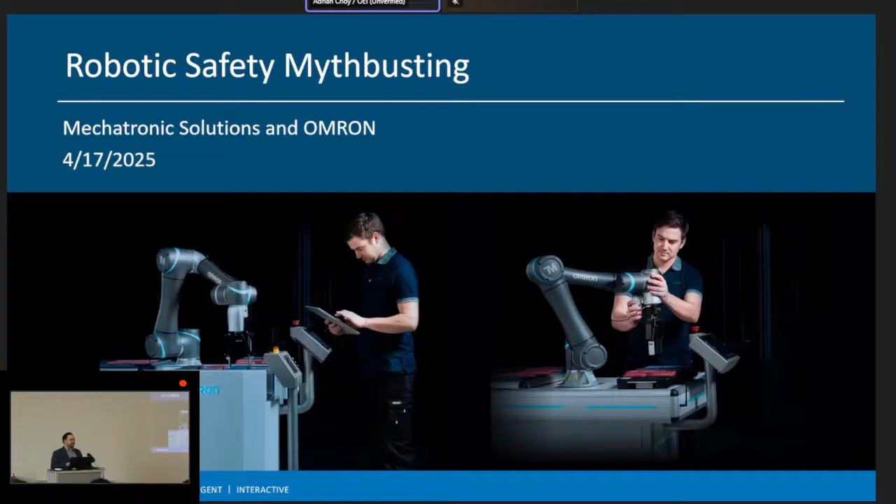Today I will be talking about myth busting robotic safety. There's been a lot of misconceptions with AMRs and collaborative robots. I think we've all been to a trade show where companies are being a bit cavalier with their robots because they have engineering supervising demos, or they want to show off the capabilities in a non-typical environment.

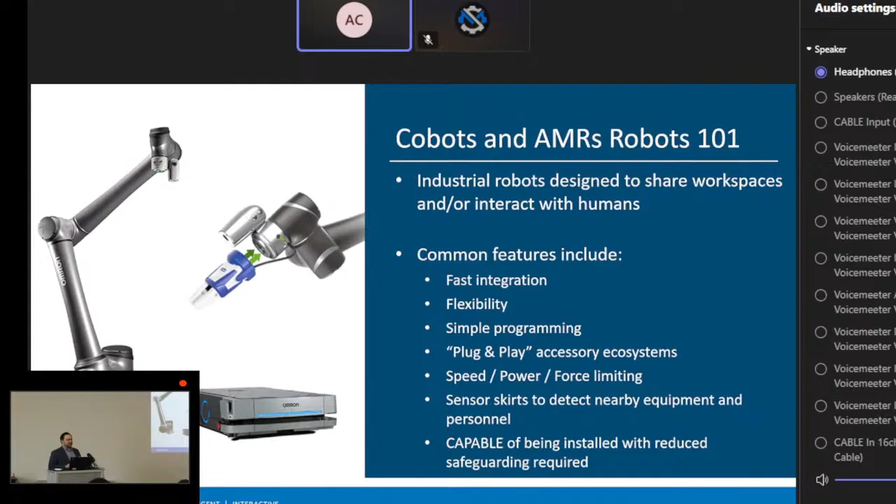But that has also led to people thinking that these types of robots are safe out of the box. Before I go too deep into this, I wanted to introduce Omron. We have existed for almost 100 years at this point. We were founded in Japan, focused on components, but since then we've developed PLCs, HMIs, safety gates, motion drives, and of course, robots. So we are a full automation provider with a global footprint.

Brief primer on cobots and AMRs. To delineate things, I will be referring to both as collaborative robots, which they technically are, but the industry has basically reserved that terminology for just the six-axis arms we're familiar with. So when I'm speaking about the arms, I'll be referring to those as cobots. When I'm speaking about both, I'll refer to those as collaborative robots.

In a nutshell, these are industrial robots designed to share workspaces and/or interact with people. That helps simplify things in terms of making the real estate more manageable, so you can have humans sharing workspaces with robots instead of having extensive safeguarding.

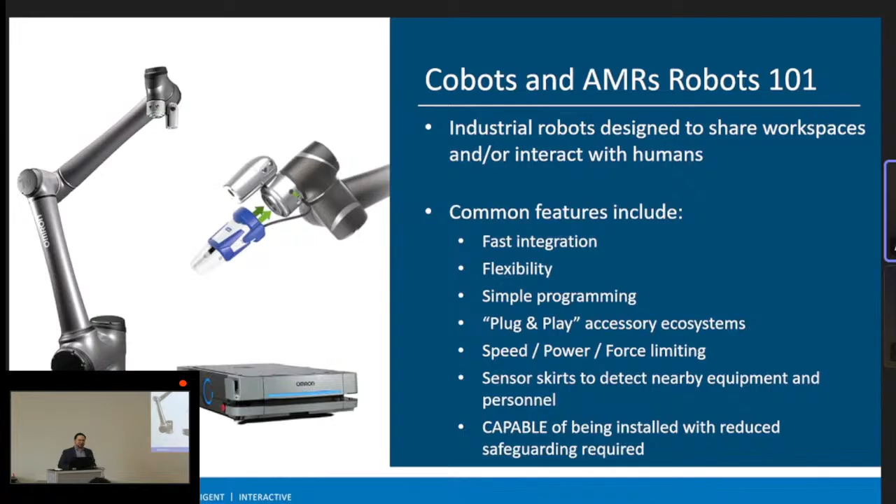Some of the features that enable this are fast integration, flexibility, and simple programming. There are usually feature sets that make integrating these robots into an existing environment fairly streamlined, be that simplified programming languages or ease-of-use features like being able to scan a map with an AMR by simply having a joystick and driving it around.

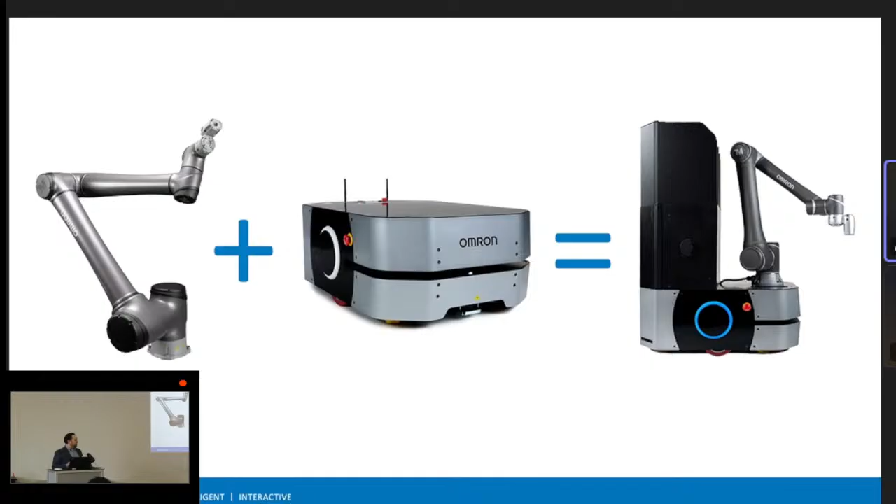Additionally, there are many partners of ours that have plug-and-play accessory ecosystems. Companies like Schunk and OnRobot have off-the-shelf gripper or topper solutions for these robots, which further simplifies developing a robotic solution. There's also options to limit speed, power, or force in certain scenarios to help comply with safety standards and regulations, and sensor skirts to enable sensing of the environment around it. Now, these robots are capable of being installed with limited safeguarding, and we're going to put a pin in that.

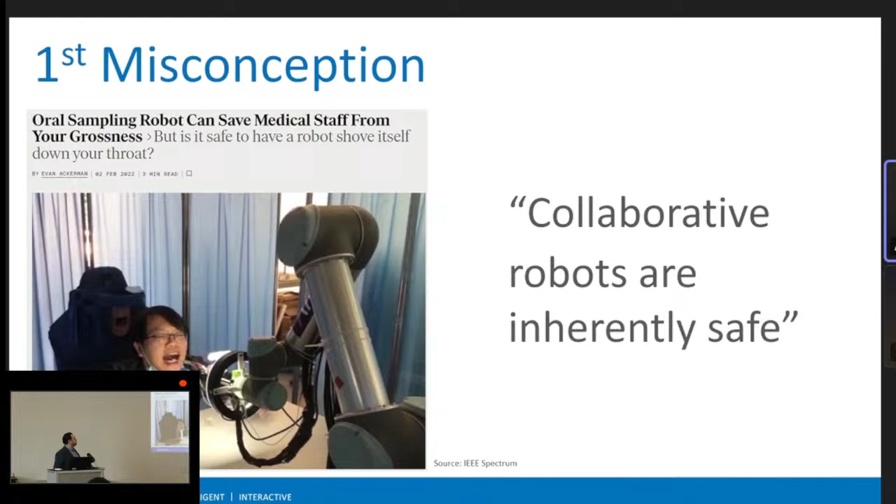So most people's understanding of collaborative robots is that cobots are safe out of the box, AMRs are safe out of the box, and if you put a cobot on top of an AMR, you get double the safety. I think we can all agree that's not necessarily the case, but that has been the public perception thanks to us talking about safety in terms of marketing, without really getting into the nitty gritty of what you need to do to actually achieve that.

Hopefully, by the end of this talk, we can understand how to communicate safety to customers and end users, develop our own understanding, and appreciate how safety can actually boost our efficiency.

So we're going to do some myth busting today, and I have three misconceptions I want to correct. First: collaborative robots are inherently safe out of the box. This is a huge misconception I find among people, especially end users and customers new to robotics.

An example here is a university in Shenzhen that, during lockdown, used a certain competitor's cobots to do COVID samples, nasal and oral. There are specific standards that say your cobot is not allowed to come into contact with someone's head or neck, so this is automatically a no-go application. Interesting idea, but not the intended scenario for collaborative robots.

So what's the reality? Collaborative robots are designed to adhere to standards and regulations. You'll often see in marketing material that this cobot adheres to ISO TS 15066, or this AMR complies with ANSI B56.5. That means these products are capable of complying with that, but you still need to put in the sweat equity to make sure the way you apply that robot complies with those standards, because an application must also be collaborative. One of our engineers at Omron has a line I'm going to steal: you can't put an ice pick on a cobot and call that a collaborative application.

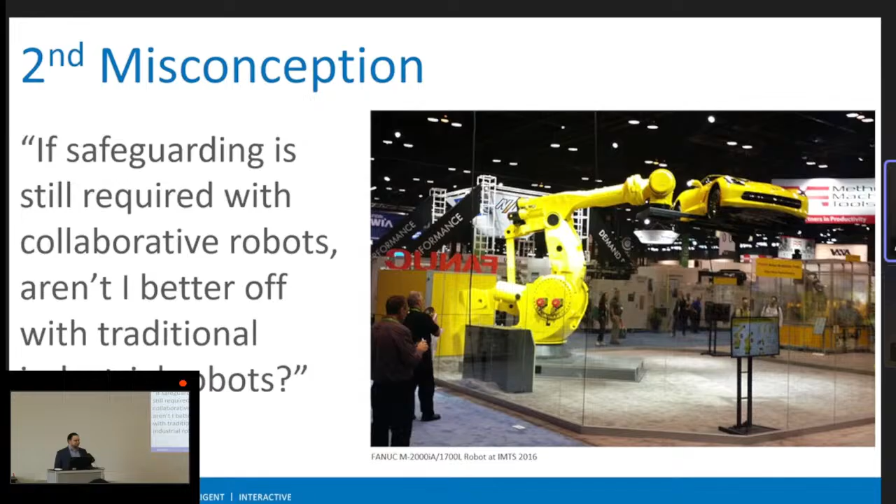So when you're looking at whether or not your application is collaborative, you have to take into account all the variables. Your payload, what are you carrying? Once again, if you're carrying molten glass and you're driving that around people, that's not a collaborative application. The shared workspace—if the robot's in motion, are you going to create entrapment scenarios where you block exits or prevent people from moving back and forth in an emergency? Even the tooling, once again, blades, anything that has too much motion like a conveyor topper, when those are in motion on an AMR, you have to be considerate on how and where that's used.

Even the payload—we'll get into a deeper dive on this. But for palletizing applications, if you have a cobot running full speed, that 10-kilogram payload can turn into a 10-kilogram projectile if that gripper fails.

So I listed here some common cobot standards and regulations for both the cobots and the AMRs, but this technology is pretty nascent. We're trying to catch up with where the technology was and when the standards were written to the present day. The standards and regulations are always evolving, especially for AMRs. We're actually going to see some standards come out and take effect in 2027 from Europe. So don't always think that if you were in compliance once that you're always going to be in compliance, and expect that from robot manufacturers as well.

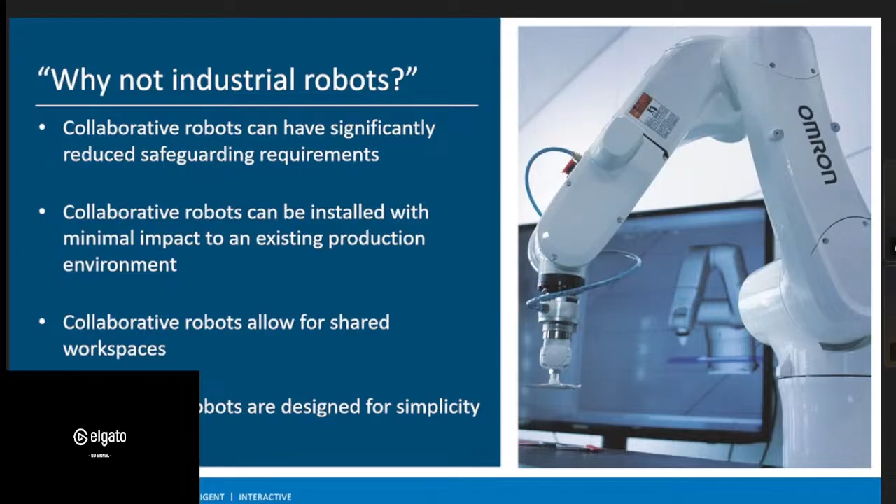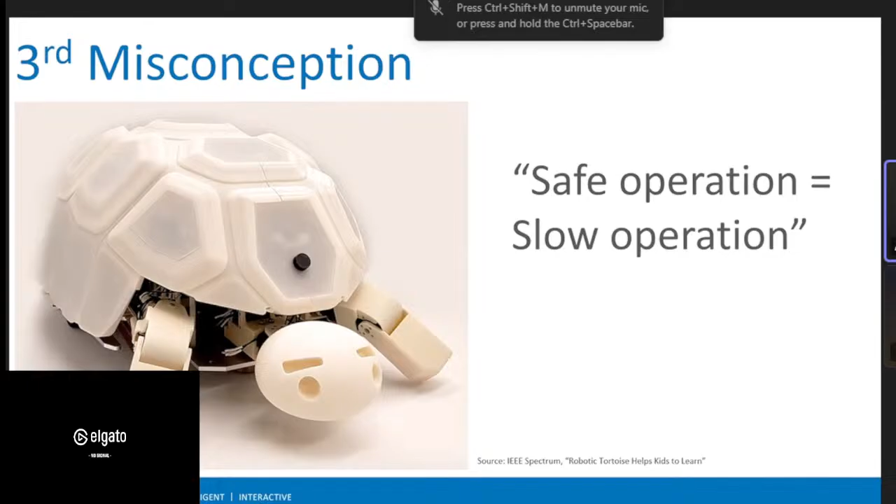Second misconception: with all that hullabaloo about they're not safe out of the box, you still need to do your due diligence—then what's the point of using a collaborative robot in the first place? You're telling me that I still have to put in safeguarding and pay for all these safety products. Well, why am I not just using a traditional robot like you see with these 6-axes, or maybe even conveyance systems instead of mobile robots?

The truth is, yes, you do need to consider everything, and you will most likely need to have some form of safeguarding, either hard barriers or safety products for scanning, but you could still have significantly less safeguarding than a traditional industrial robot or a conveyance system. So if you are tight on real estate, if you have an existing application, you want to shift from manual labor to automated labor, you could reduce how much you have to shift your existing space with these collaborative robots if you play your cards right and respect safety.

That is also to say, you can make sure that if your application still requires a human touch, human intelligence, something that we can't automate yet, you can still share those workspaces, but automate the menial tasks such as pushing carts or screw driving certain things, and leave humans to do the more intensive work that requires our brain power, like detailed inspection, metallurgy, loading test samples into testing jigs for medical applications, things of that nature.

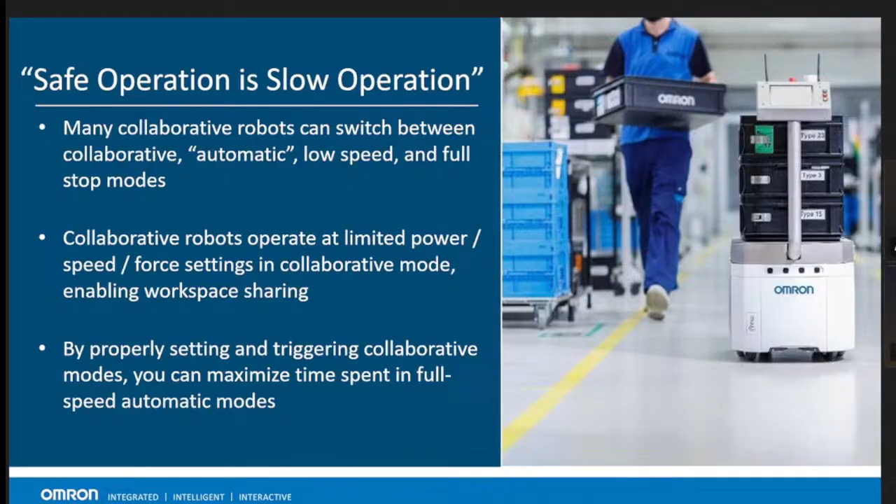And again, collaborative robots are designed for simplicity. A lot of the programming platforms for these are useful for redeployment. So if you are a small to medium end user or customer and you're growing, this might be a good step to have an affordable option to invest in for automation now that you can easily repurpose and reconfigure as your production area grows.

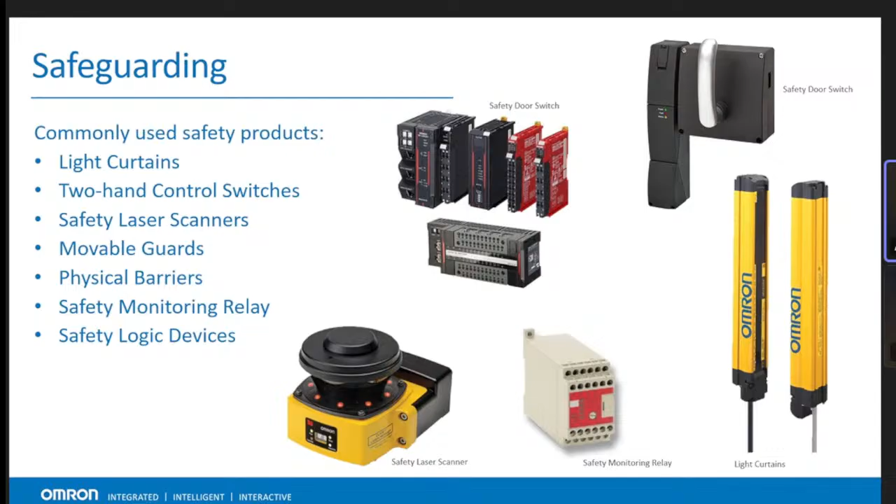The third misconception: safe operation is slow operation. If I have to use a collaborative robot and safety scanners, and if I have to shift to slow speeds, then that's just going to slow down my production, and I'm better off with 5 people working around the clock doing this, or an industrial robot instead of using a collaborative robot.

That's not necessarily true. And if you play your cards right, you can actually increase your overall operating efficiency. All these collaborative robots, the cobots and the AMRs, have different modes they can switch between. So for example, there might be a demo out there where a cobot hooked up to a safety scanner based on the proximity of people around it can either go from a higher automatic full speed mode to a slower mode to a full stop based on the proximity of people. And you can configure that based on the stopping times you need, the type of application you're doing.

Similar for AMRs, you can have zones in your workspace where the robot slows down if it's a high traffic area, or even a no-fly zone so it doesn't block a certain area that people need to go through without worrying about AMRs. So yes, you will see slower speeds when you are sharing workspaces, or even see a stop in the robot while those people are in there.

But if you configure your safety correctly, where you maximize the speeds and times during which people are not in the area, you can make sure that those slow interactions only happen when people are in proximity to the robot, and you maximize your cycle times when they're away.

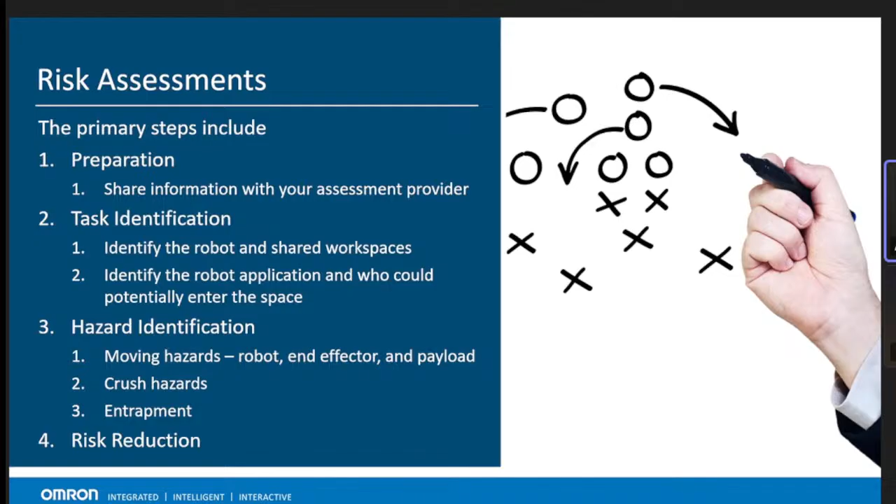Of course, this also requires you to bring awareness to your workforce to say, hey, don't just hover around the robot, respect the safety around the robot. Don't film a TikTok of you jumping in front of a mobile robot to show that it stops. All of that. You have to educate your workforce. But this can be a vehicle for you to save on real estate, save on safety products, and still maintain high cycle times, assuming you've done your homework.

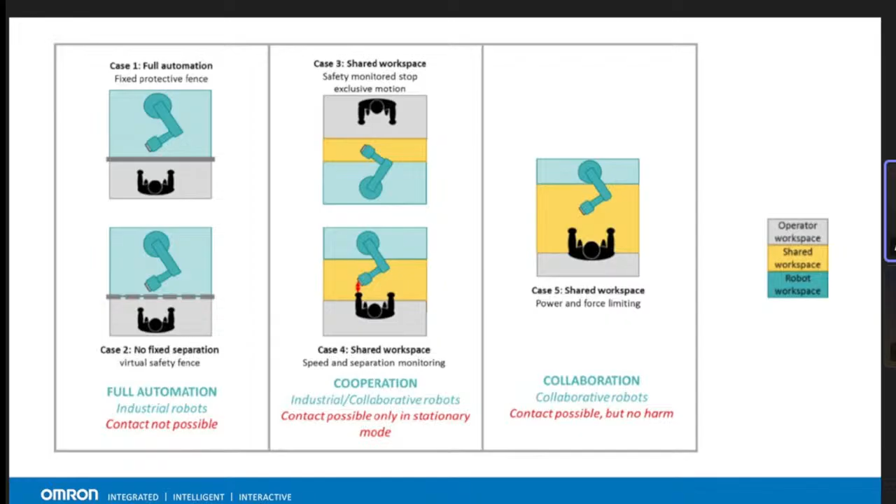And in terms of safeguarding, there's a lot of flavors you can do, and the correct answer is going to be wholly dependent on your workspace. Of course, we have light curtains, two-hand control switches to make sure an operator's hands are out of the way of a robot's working area, safety laser scanners to scan a wide distance, and even distance between a person and the robot to have multiple safety zones. Physical barriers are an obvious choice. And then other items like safety logic devices and monitoring relays if you want to connect to wider systems.

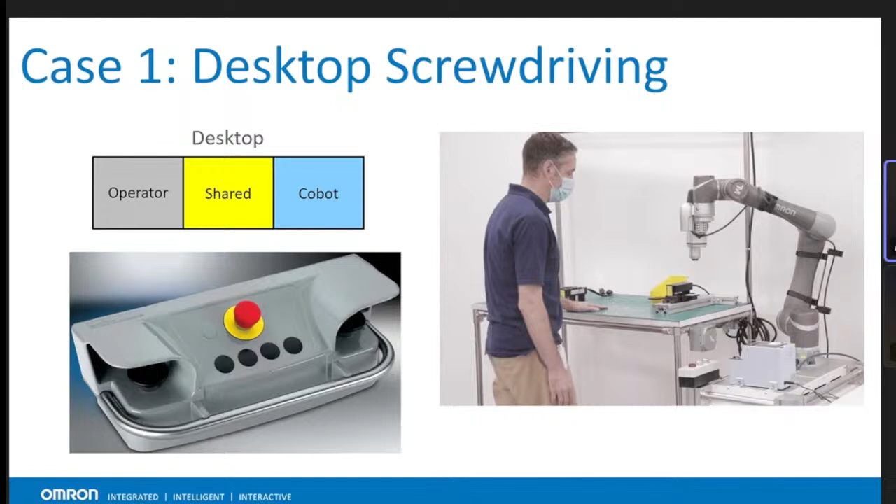Risk assessments. So this is something I see many customers and end users gloss over. In order to comply with many of the standards and regulations tied with robot safety, a risk assessment is always required. Now, it goes into much more detail about this. I could do a whole day seminar on risk assessments, but from a mile-high overview, there's 4 primary steps.

There's preparation. You have to identify who is going to do your risk assessment. Sometimes a robot provider can provide that for you, sometimes your system integrator, maybe even a third party. But knowing who to rely on is going to be your first step. Secondly, you want to provide as much information as possible about the workspace, the application, the robot model. That will enable your assessor to hit the ground running.

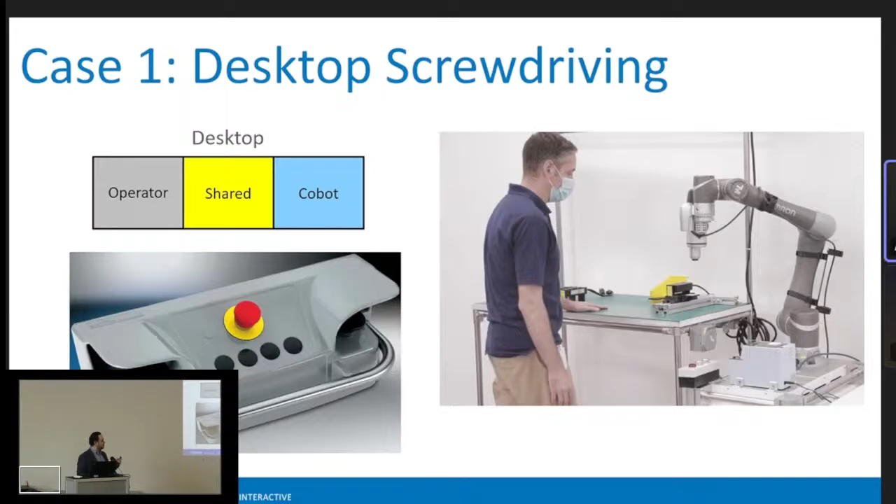Task identification. You want to make sure that you identify the robot and the shared workspaces. Have that mapped out. You want to make sure that you have a plan in place, once again, to accelerate the risk assessment process, and make sure you identify who or what can enter the space. Is there going to be a forklift that comes in and drops a pallet off in proximity to your collaborative robot? Is there a high traffic pathway for people to walk through that crosses your AMR path? That also not only helps you design around that, but also know who you need to give awareness to about how to behave around these bots.

Third is hazard identification. What on this robot actually poses a risk? So once again, is it the tooling when it's in motion, a conveyor topper that can cause finger damage?

Okay, I had to screw up at one point.

There it was. Crush hazards. There we go. Anything like that that could potentially pose a threat. You want to identify the risks so you know how you can actually mitigate them.

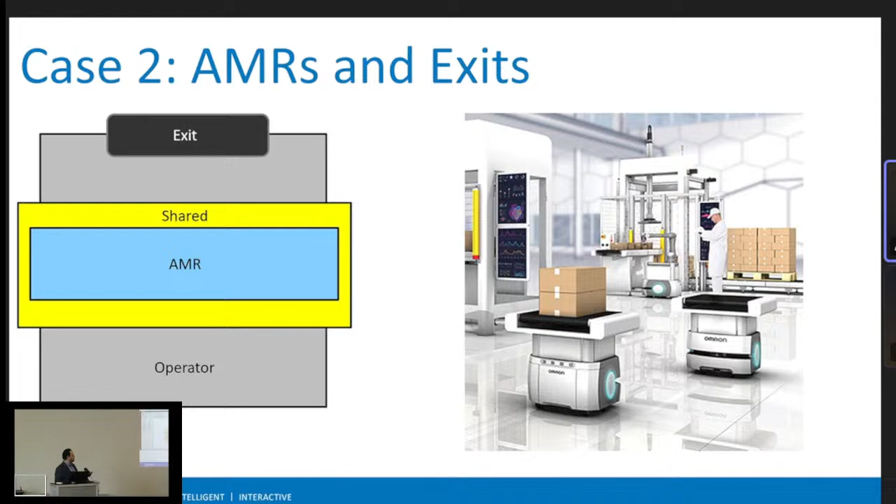And then that leads us into our 4th step, risk reduction. You identify where things can go pear-shaped, and you're doing your best to do risk reduction. Now, in many cases, you won't be able to completely eliminate risk, but you can at least mitigate it as much as possible and have a response when things go bad. Once again, these are required for certain standards. It's something that when you are considering purchasing a robot, you want to be prepared to address this.

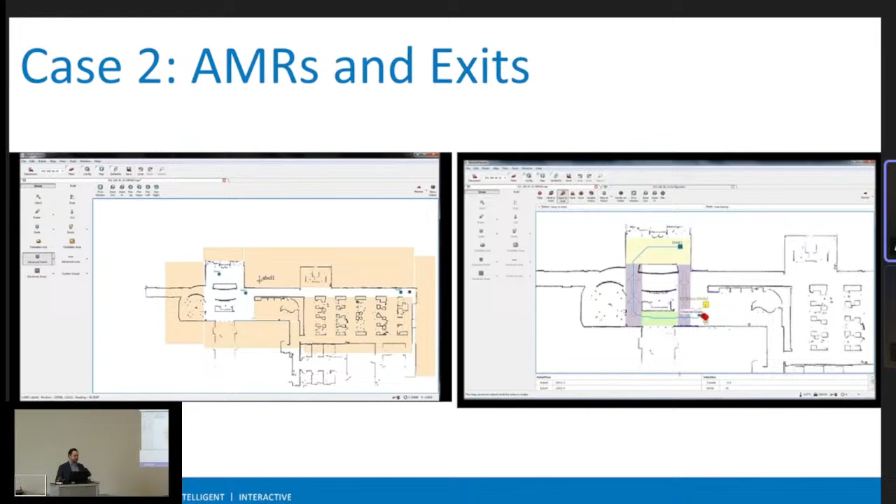So we're going to start with a simple case first, desktop screw driving. So let's assume you have a collaborative robot mounted near a desk. You have an operator that loads a part onto a jig. The cobot is receiving screws from a screw dispenser, screwing them into the part that you loaded on the jig, and then the operator takes that off and does some more post-processing work. This is a fairly common application we see for cobots, where you just want to automate the menial tasks while the person wants to do the tasks that require that human level of intelligence.

So the main risk here, assuming that that cobot could never reach the height of that operator's neck or face, is going to be a crushing hazard. So what happens if that person has their hand near the jig while that robot's performing that screw driving?

There's a few options we have here. You could have that in an enclosure with an open top with safety gates. So if the safety gates detect that the person's hand or arm is still in the proximity, it'll stop operation until that person withdraws their arm.

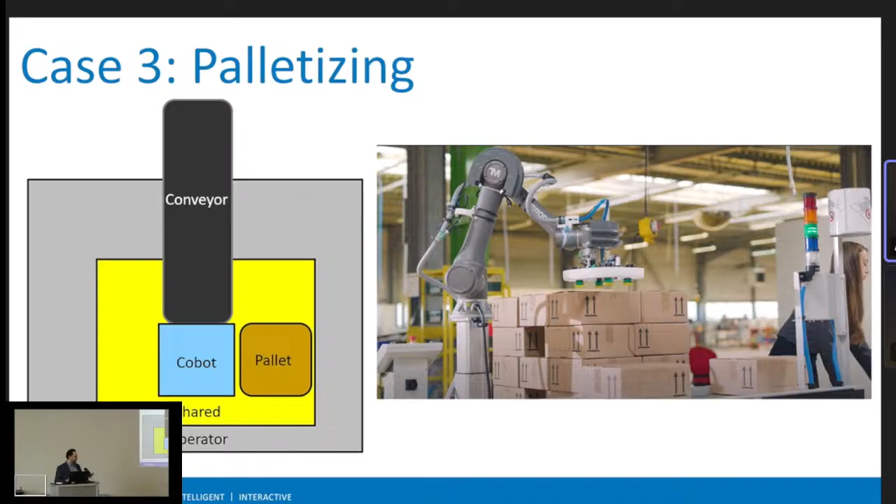Let's go into a harder one. AMRs and exits. So this could be any AMR application. But what happens when you have an emergency in your plant and you have either AMRs still moving, blocking exits, or they respond to an alarm in your system and they block an exit during a fire? Not an ideal scenario, especially with the sizes we're seeing AMRs today, where they can be absolutely huge with heavy payloads that you can't just simply push out of the way.

So in this scenario, we have an exit up here, a shared pathway used by both AMRs and operators, and obviously a clear path between the operator and the exit, assuming that there's no AMR in the way. So you could have it where you have an alarm system in your facility communicating with the PLC that communicates to your fleet. So you can have it where an alarm system will trigger some sort of desired behavior in your AMRs.

Now, if you have to have a path for your AMR that could potentially block an exit, you'll need to consider something like having a routine that runs when that alarm trigger is triggered to send the fleet away from these exits, to move to a position where it knows that it can't be a blocking hazard and entrap people. Alternatively, you can even map out no-fly zones for your robots.

These are screen shares of Mobile Planner. All of these different colored boxes are different sectors. So for example, this purple sector here indicates that the AMRs can only move in one direction. Or we have areas like these orange spots where these are no-fly zones. The AMRs cannot enter there even if they have to reposition and reroute.

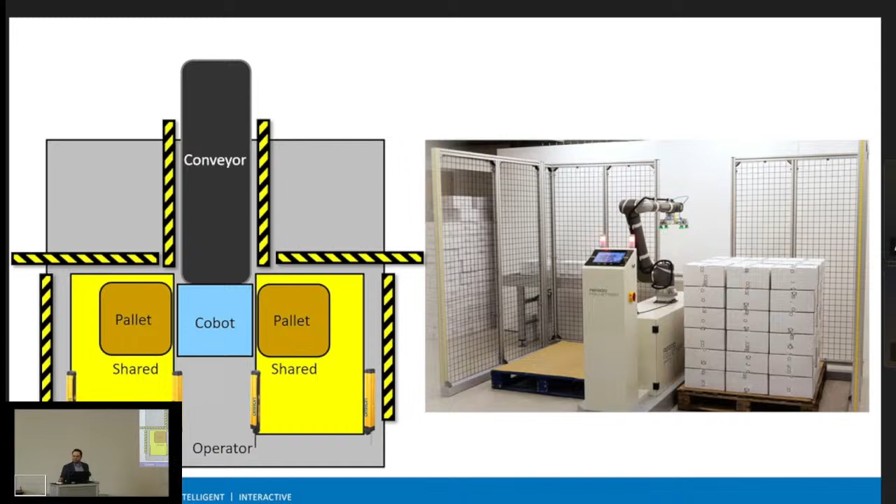So we have to respect physics when it comes to robotic safety, not only in terms of, hey, if this cobot's moving at 100% speed and someone just starts bum rushing at the robot, you have to respect that the robot still needs time to actually stop, which will determine what sort of distances your safety devices are able to actually detect the presence of someone or something and react accordingly. So there's a lot of variables here, which makes palletizing a very interesting application.

A potential solution is actually to put up safeguarding. So yes, you will have to have hard barriers in this scenario where you also have two sets of safety light curtains here. So in this case, we set up two pallets side by side on the robot. So one can be loaded by a forklift or someone with a push cart while the cobot is working on the second pallet here. So this safeguarding helps prevent those payloads from becoming projectiles. The robot can either stop or reduce speed when someone or something is in proximity to the safety light curtains, and then resume operation when everyone's out.

So we're starting to see a scenario where it may be more practical to have a traditional industrial robot. I'm not trying to tell you that collaborative robots can solve everything. There are scenarios where, based on your target cycle times and your overall efficiency goals, you may want an industrial robot where you have to have extensive safeguarding. You may want conveyance systems instead of an AMR fleet that can adapt to a dynamic environment. And I think that's an honest conversation you have to have with yourself.

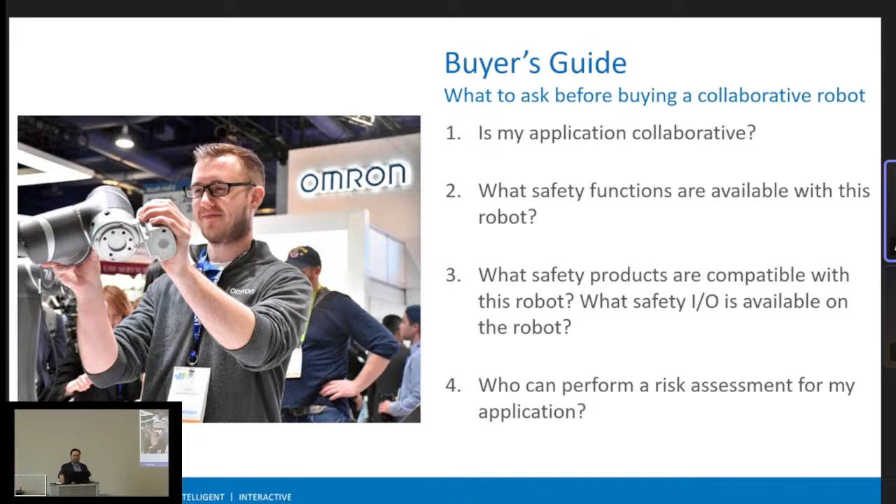Cobots are indeed sexy. They're on the front page of every single trade show advertisement. But don't ignore traditional robots when it comes to performance. And I'm not just saying that because Omron sells industrial robots as well. So

It depends on the manufacturer. A lot of times, more traditional industrial robots, these are all industrial robots, but I'm going to refer to SCARAs, parallel robots, and articulated arms that are not collaborative as traditional. It really depends on the manufacturer. Oftentimes, the more traditional robots are more expensive because you're getting more performance out of them. Because they're expected to have safeguarding, they can simply go faster, move higher payloads, things of that nature. And that also relates to the cost.

But once again, there are some companies coming out with very affordable industrial arms. It's kind of an it depends answer that I don't like to give, but I have seen collaborative robots be on the cheaper end by merit of them not being able to go as fast or lift those higher payloads. And I think we're starting to see the upper limit of what those can do. Like I said, there's only so far you can reach and only so much you can pick up before you violate what it is to be collaborative.

We're currently sitting around 30, 35 kilograms as the market upper level. But if you're telling me that you can have a 5 meter long arm pick up 100 kilograms, how do you make that collaborative? How do you share a workspace with anyone under that condition? So... By that, you just mean that it hits you, it stops, right? It's essentially, yeah, but at that payload... Oh yeah, you said at that point, if it would strike someone, it would stop, well, to be collaborative.

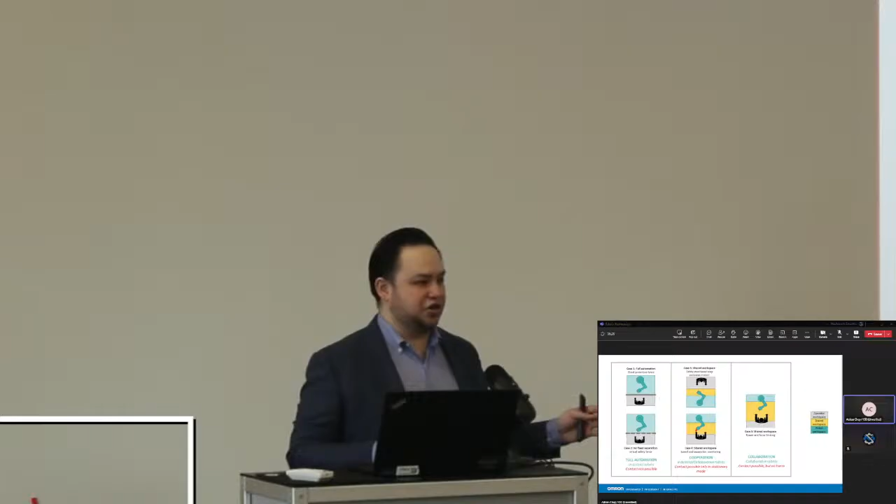That's right, is that they have protections that when they impact a person, they won't go through them. They'll stop. They sense that. And what you're saying is by going to too large of an envelope or too much mass, it doesn't make any sense. By the time it can't physically stop that quickly, it's going to do damage. Correct. Or if you were to set proper safety variables and speed and force limiting, you might have a diameter that goes from here to the parking lot where no human can safely enter and the robot has to fully stop. At that point, it doesn't become practical with the current standards we have.

But collaborative robots are designed... If you're preventing or minimizing... Minimize, that's an area that can't withstand much pressure. So if you're having a collaborative robot or a traditional robot contacting somebody at a very sensitive part of the body, it's going to cause damage. Yeah, and collaborative robots oftentimes will stop if they sense some sort of resistance, but that is still a worst case scenario. We want to prevent any scenario where the robot comes into contact with anyone, even if it is one of the quote unquote safer regions at a slower speed.

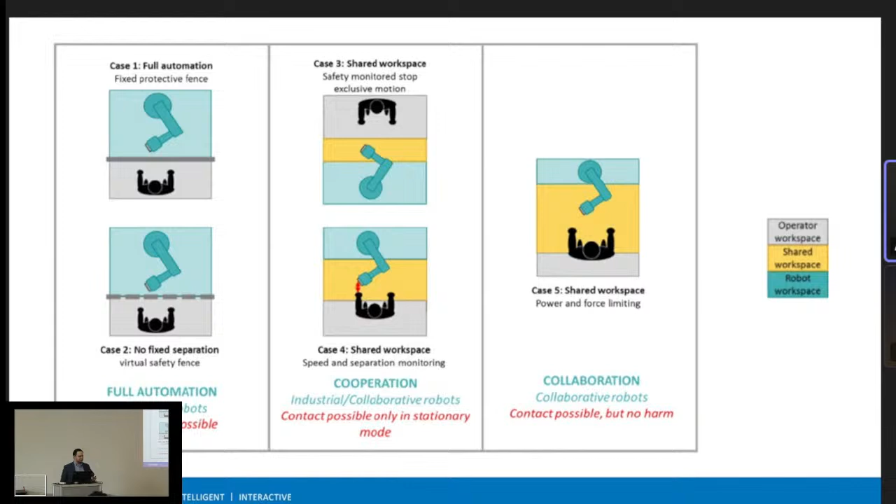So that actually is a pretty decent segue into my last slide here. So, buyer's guide: what to ask your customers and end users before they dive into the world of cobots and AMRs.

First one: is my application actually collaborative? Once again, if you have ice picks or 300-degree tempered glass straight from the oven, that's a non-starter. I would retool people towards looking at safer traditional industrial systems where you still need that safeguarding, and you might even get a little bit higher production efficiency.

Two, what safety functions are available with this robot? Obviously you have your standard suite of e-stops, but you also have to consider safety scanners. Can those safety scanners be configured based on the payload? With AMRs, oftentimes you'll have larger toppers or payloads that overhang and extend beyond the robot's footprint.

How many safety scanners are on this robot? Can I configure them to not get false readings on the payload and just stop? Can I attach more safety scanners to it? What safety products are compatible with this robot, and what safety IO is available on the robot?

Once again, can I add more safety scanners if I have a niche application, or something like a mobile manipulator where you have a collaborative robot on top of an AMR? What can I do to add to this solution to ensure I'm still complying with safety standards and regulations?

And four, who can perform a risk assessment for my application? Once again, is that your robotics provider? Is that your partner or SI? Is that a third party you can hire out? Having all of these answers up front can help you with your buying decisions and even your fundamental design of your robotic solution, instead of realizing this halfway in and having to redesign the whole kit and caboodle.

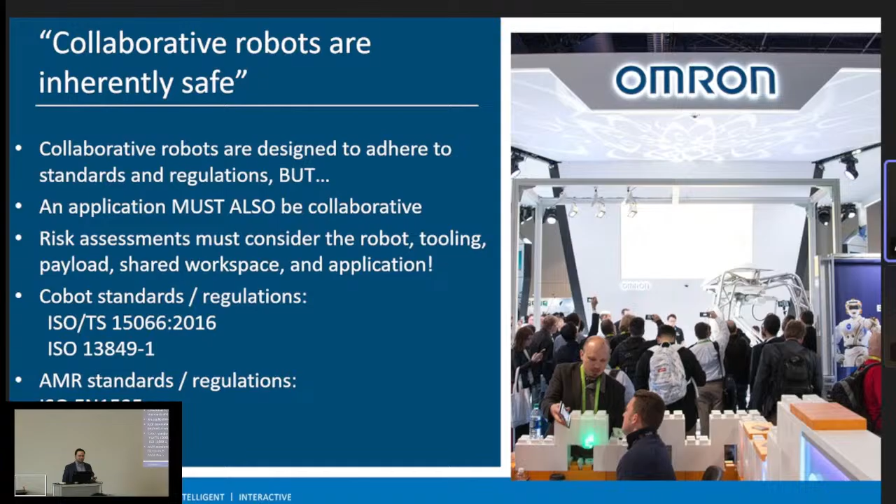That's another 'it depends' answer. Of course that's going to be based primarily on payload and performance, so most cobot arms are priced by their payload and reach. I would say market prices for collaborative robots can be as low as $5,000 up to, I would say, $75,000 USD. Sometimes the cheaper ones have limited functionality, maybe not as graceful programming instances, or are just otherwise made of cheap components. So you definitely don't want to overpay or underpay for a collaborative robot. I would definitely refer to that buyer's guide I shared at the end to make that selection.

Similar for AMRs, there are a lot of autonomous mobile robots out there. Bear Robotics has robots that are for restaurants. I've never seen those robots in an industrial application. I've seen them carry sushi to my table a bunch of times, but even though they're on the cheaper end, is that going to suit your industrial environment? So you're talking about Payless shoes—or that was a bad analogy because I don't know any high-end shoe providers—but do you want a Rolls Royce or a lemon?

I think you had a question.

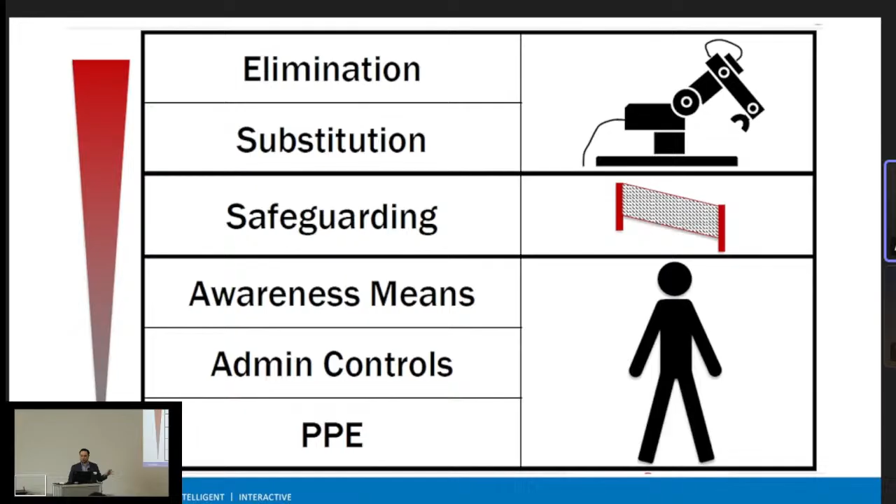They fail and they will result in a safe outcome. So that's why it's something to take into account, the potential for failure of partners. So if you think of something like a mobile robot driving...